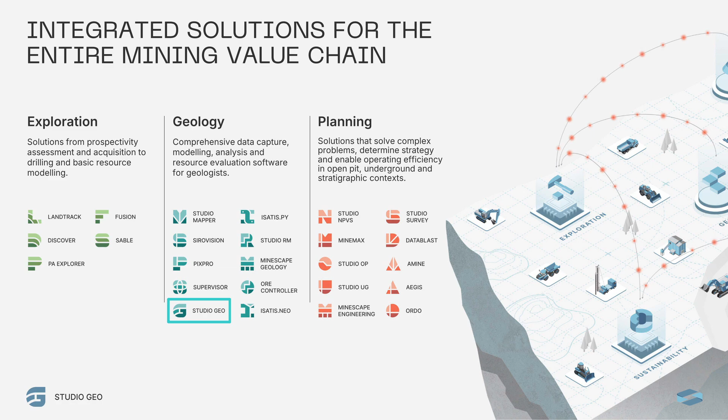So where does Studio Geo lie in the mining value chain? Obviously Studio Geo lies very firmly within the geology suite of softwares. If we look into it a little bit deeper, it's meant to bridge the gap between your data collection, your logging, maybe Studio Mapper, and then Studio RM, which is very much focused towards resource modeling. So Studio Geo is meant to fill in that gap. It's meant to be a more simplified and slimmed down version of RM with a specific focus on implicit modeling.

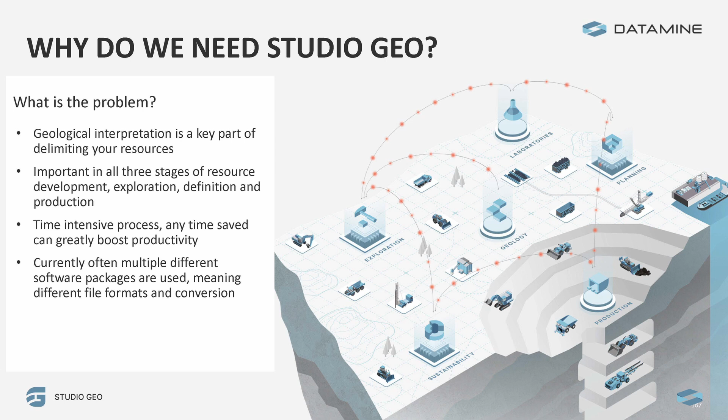So, why do we need Studio Geo? What's the problem that we currently have? We're all geologists here. As we know, geological interpretation is a key part of delimiting your resources. It can be a very important thing in all 3 stages, from exploration to resource definition and production.

One thing about modeling and interpretation is it can be a very time-intensive process. It's also very important for furthering all other aspects of your geology. You can't have an accurate resource model without also having an accurate geology model. So this means that any time saved in this initial modeling can have a great productivity boost later on down the line.

As we know through talking to customers, talking to you guys, often multiple different software products are currently used for this stage. You might decide to make your wireframes in one software package and then convert them to another, and then convert them to a Datamine format to do your resource modeling. So as we heard earlier, one of the main focuses at the moment is trying to get everybody onto the one system, so there is no longer any need for conversions, exporting, re-importing.

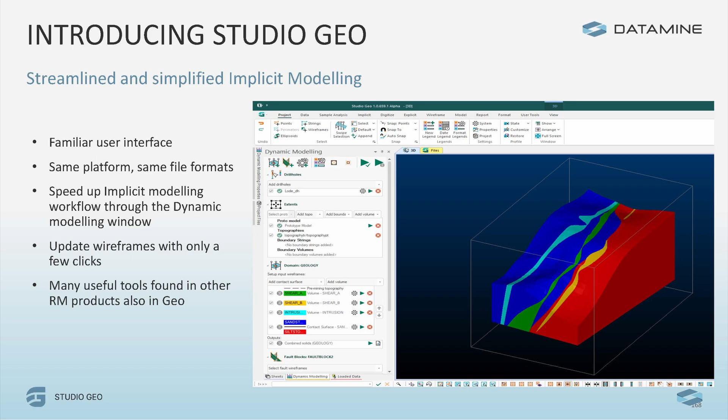Now, one of the key things that we have been working on is speeding up our implicit modeling workflow. So we have this dynamic modeling window, which is that little box to the left. This has basically been made as a streamlined version of our implicit modeling tools. The implicit modeling tools do exist in RM, but as has been said before, RM is very much a sandbox program. You can do whatever you like with it, but there's no specific workflow. So this is meant to be streamlined and simplified.

One of the things we have been aiming for is updating your wireframes with only a few clicks. We'll get into that later. I've got a video on how the model creation works. And the last thing is many other useful tools found in other RM products are also in Geo.

So obviously development is still ongoing. It's not a completely finished product. We have a product that we're testing, we're working with. Some of you might tomorrow get to see parts of it if you're part of the workshop. But in general, a lot of features in RM will also be included in Geo, including some of the more useful ones like macros; scripting is all going to be included.

So this is a very simplified version of the model creation process in Studio Geo. This is not exhaustive or necessarily the way you're going to do things in practice, but it gives you an idea of how the tools work, what it looks like. So I'll try to live commentate it. It might be a bit hard because it might be a bit quick, but let's see how it goes.

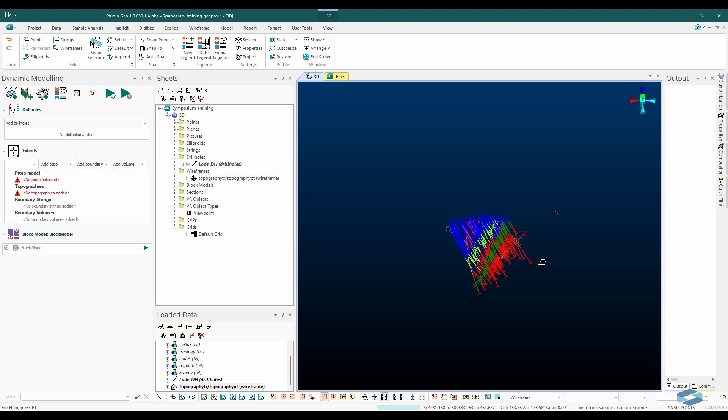So as you can see, we got some drill holes there. It's very basic, a major contact and 2 little intrusions. The very first thing you do is come over to your dynamic modeling window and select your drill holes. These drill holes have already been preloaded. You can see that it's all loaded in there, ready to go. And there's a couple of options there that we can go into in more detail later.

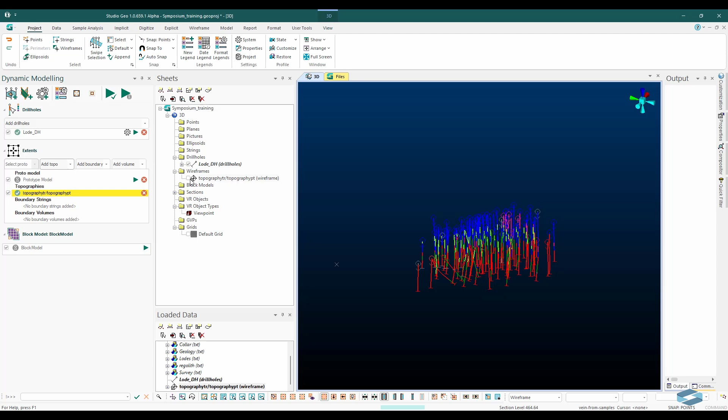This allows you to select a proto model, so basically the boundary for your model, and you also need a topography. So it does need a topography to run. So that's your input data there. It's all pretty easy peasy so far. Now from here you can also add things like boundary strings or boundary volumes, so you don't have to generate the model for the entire area all at once. Obviously if you've got big data sets, that wouldn't be too useful.

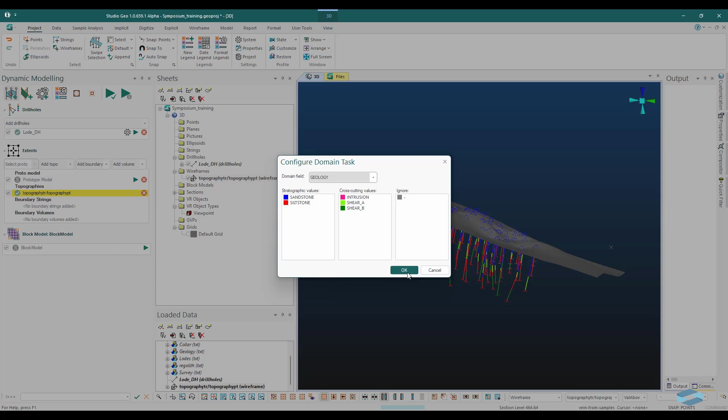So you can click on this add domain button, it brings this up. These are all attributes off your drill holes table, and from here you can select your geology and pull your geology into either stratigraphic or cross-cutting values. So you can see there, that's all loaded into the dynamic modeling window. Those arrow buttons are basically your age relations, so which is older, which is younger. And from here, you just press the go button and then watch it run.

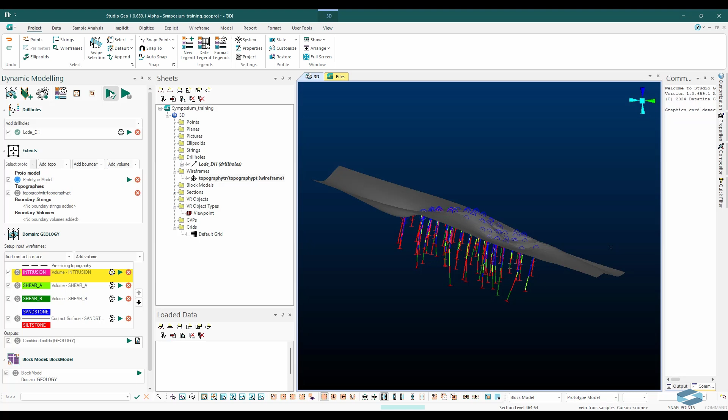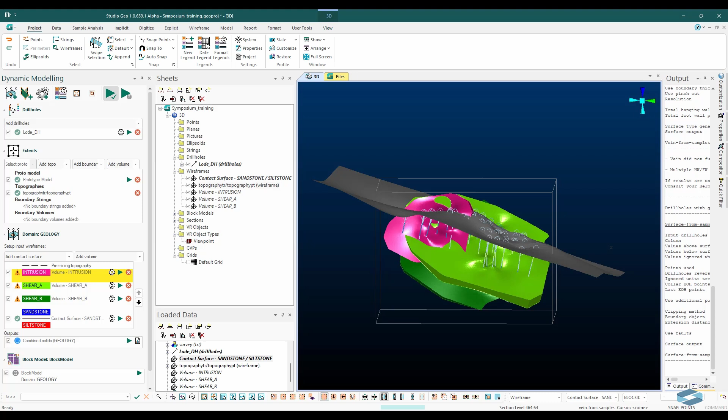So as this is running, you might see a couple of toolbars come up. It's basically going into each of those lithologies that I have loaded in there, and it's generating the shapes based on a set of rules. There's little cog buttons that go into all of the generation parameters, so it's all customizable. You can change everything, and at the end of the day it will create one large model with a bunch of smaller shapes that you can turn on and off.

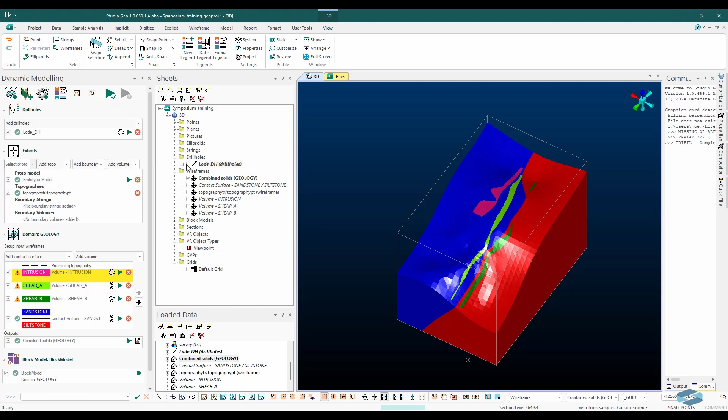So that's, again, the very, very basic model, but there you go. You can see, I think, 3 intrusions and two major rock types. And that's the generic object you'll get out of there. And then from there, you've got separate objects for your intrusions, cross-cutting rock types.

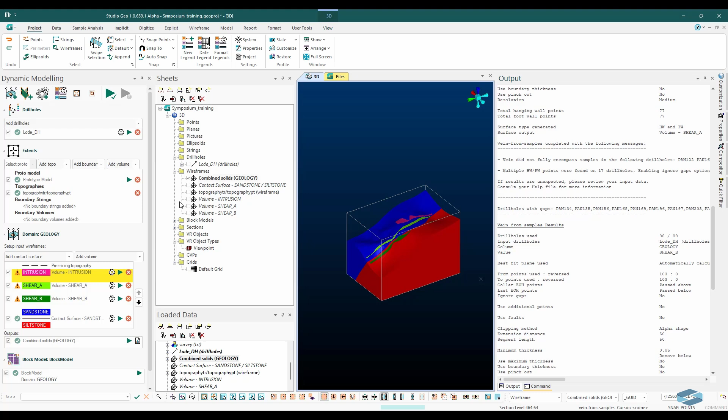Here the output bar will show you all of your generation parameters, so all of your options that you've selected. This can be useful for validation. You can save this for later if you want, or you can compare. That's a little thing that will show you what's wrong, error messages if you have any. And they're just a couple of the shapes that have been generated.

So it's a fairly streamlined system. That's basically what it's been made for. And at the end of the day, you will end up with a little model just like that.

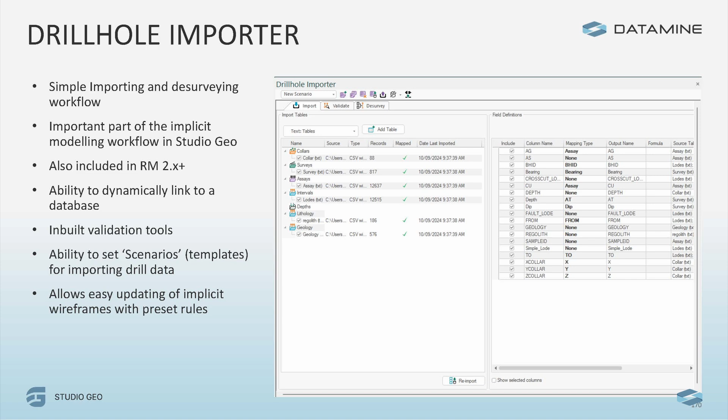One of the really good things it can do is it can dynamically link to databases. So that means when you have changes in your drill hole data on your server, these will dynamically update if you have your drill hole importer set up. There are inbuilt validation tools if you do end up having validation issues in some of your data. Hopefully most of it would be cleaned up by now, but it will catch it, which is really useful.

We have the ability to set scenarios, which are basically just templates. This is especially important if you do have a live link to your database. When it reruns, it'll basically use all the exact same options as you've previously used to run all the new holes. And for us in Studio Geo, it will allow the easy updating of the implicit wireframes with preset rules. So you set your rules up in this, you press the play button, it'll reload your drill holes and then recalculate your wireframes based off these new drill holes.

So a couple of other useful little features that you might be interested in. Like I said, probably the main focus is the easy updating of your wireframes through the drill holes, the drill hole importer. You can create and add surfaces to your model as you go. So in the model that I just showed you, we obviously had all of our lithology set up, ready to go. There are options to, instead of running them all at once, flag something, tweak something a little bit, and then insert it later on. So we have easy ways to do that, buttons and drop downs.

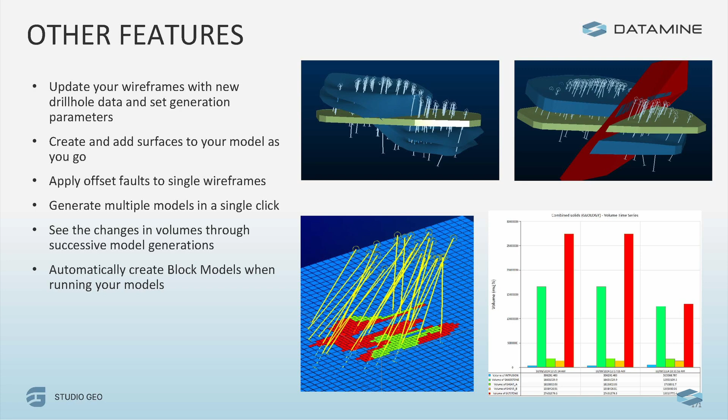We can see the changes in volumes through successive model generations. So this is the bottom right. This is basically a validation tool that allows you to see changes in your models. In those first two pictures, they're very similar. You might have only made a few really slight changes, added a couple of extra samples, done some mapping. That third one is the same model. Maybe you've decided to lop off a whole bunch of your model, or do it only in a specific area. And as you can see, your rock volumes have changed.

So obviously, if you're modeling a surface and you've run your model and all of a sudden your rock volumes have dropped by two thirds, you're probably going to want to check that and see what's up. And finally, it will also automatically create block models when running your models. So at the end of the day, if you run a regolith, geology, and alteration model, it'll also generate a block model with all that data in it automatically.

So, what is next? Obviously, the development is still ongoing. We're reaching a point where we'd like to start showing it to customers. We've started showing it to people already. And ideally, the rollout will happen sometime soon. But for now, we really are focusing on improving the tools and the stability of Studio Geo.